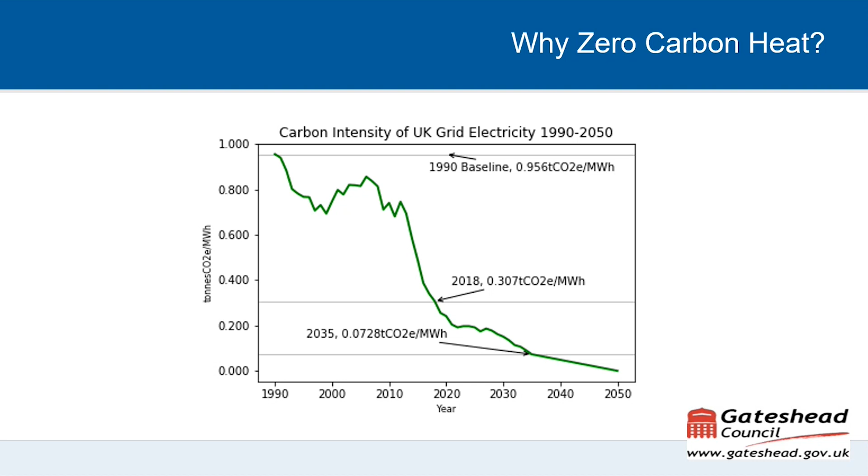It's completely opposite with gas and heat. If we did nothing, we'd be waiting until 2040 or 2050 for similar decarbonisation. And as a borough with a zero carbon target for our assets by 2030, we've shifted focus onto zero carbon heat. Next slide, please. There's many ways we can decarbonise heat.

It's also significantly the first UK trial of a public blended gas network, where 20% hydrogen has been going into 650 homes in the village of Winlaton over the last year or so. That's really helping Northern Gas Networks agree and set the new framework and regulations for the industry and the HSE to allow blended hydrogen to go into the network across the UK.

However, we accept that this really is the long game. We know there needs to be hydrogen generation infrastructure coming, and we don't expect to see massive impacts from this before 2030. So it still leaves us with a challenge between now and then.

I'm sure the audience will be very familiar with individual heat pumps, and our view at the moment is there's great application for those, particularly in new build. However, we remain concerned about their suitability in retrofit, both from a technical sense and also from a cost perspective, particularly with the current cost of living crisis and energy prices. We're loath to support anything that's going to potentially put customers' fuel bills up further than they are.

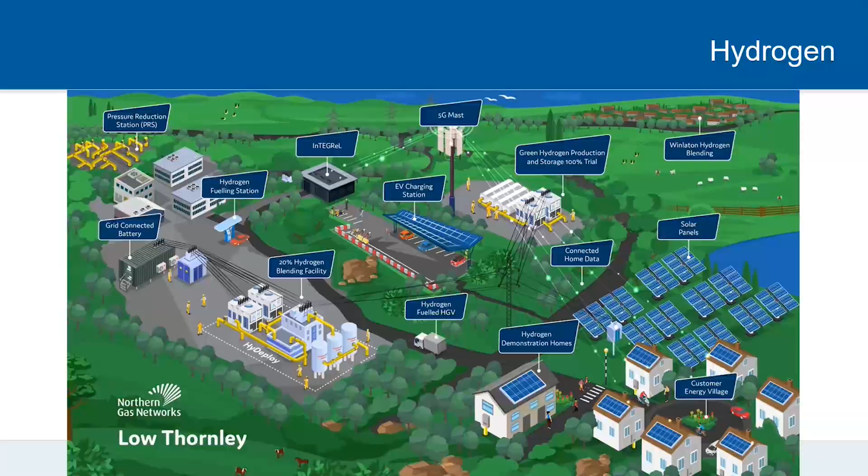So that leaves us with heat networks. In the last 5 to 10 years, we've been really exploring how we can deliver and develop heat networks to provide lower cost and lower carbon heat to customers. We're finding that these remain the most viable option for us this decade.

Yes, there's high capital costs for these, but we find there is a lot of grant support available. Importantly, these can operate on a long-term business model, using the revenues from selling that heat to recover all of those capital investments in the early years. Most importantly, we feel this can be done while keeping heat tariffs at or below the current gas market. So at the moment, we feel this is one of the only technologies to deliver that low carbon solution without putting a premium on people's heating bills.

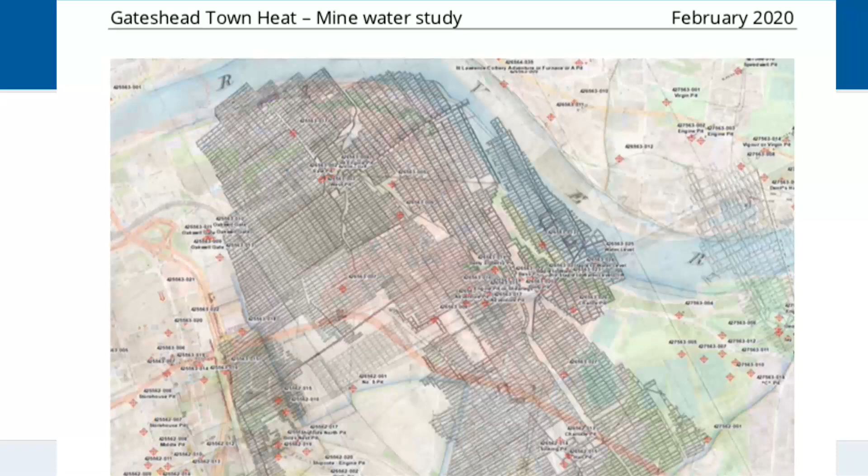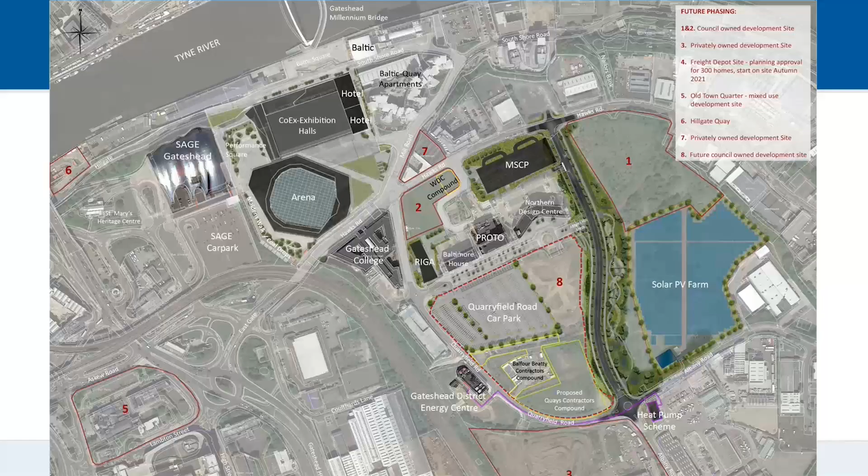Then what we do is take that mine water and put it into a heat pump building. This is probably now the UK's largest mine water heat pump system operating. We can say it's operating because we turned it on for the first time 2 weeks ago, and had our formal launch yesterday, attended by contractors and the Coal Authority. It's doing what it said - it takes that water out, chills the mine water, and heats up our water that can go into our network. This asset can now run for 20 years plus, and importantly, we think it's going to produce about 40 to 50% of the heat on our network going forward.

So what our challenge is now is that we've demonstrated the viability of heat networks in the urban core, where heat loads are dense and we have a good mix of loads. What we're trying to do now is get out to our external housing sites, both new build developments and existing ones.

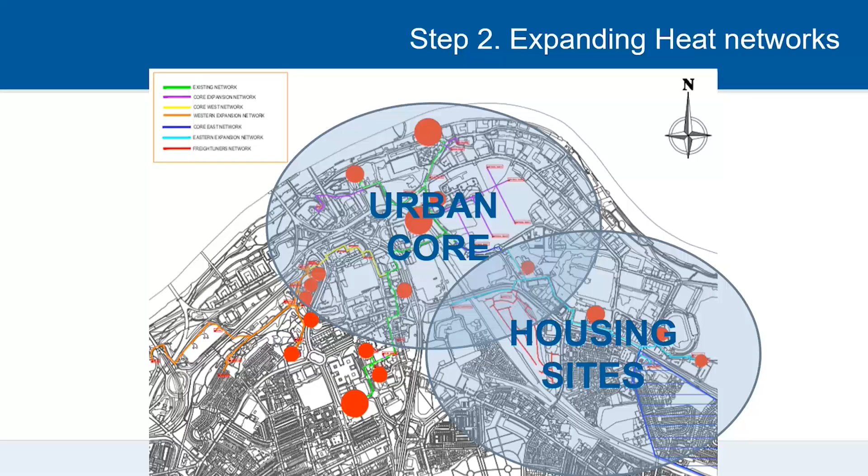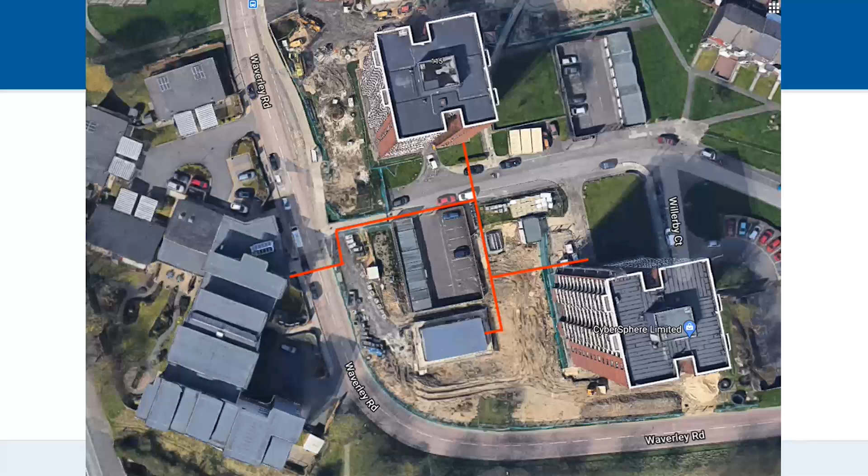As well as making the technology work in the plant room, we need to make it effective for customers. All customers receive a heat interface unit no bigger than a combi boiler, so effectively it's interaction free with the customer. They simply control the heating through a thermostat and a timer like they would a combi boiler, which makes it very easy to use.

The other thing we need to get in place is our metering and billing infrastructure. We work with third parties so that customers get a very slick, easy to use platform that allows them to do smart prepayment to settle their bills, and it also provides response and maintenance for any issues they have day to day.

With the technological learning we've had, and working on the commercial and servicing side, we're now in a position to take heat networks into new build housing developments. This site is called the Freight Depot site - 271 units, delivered in partnership by the council, Vistry, and the Gateshead Regeneration Partnership, which is taking that forward as a development. We've come alongside that and offered them a heat connection.

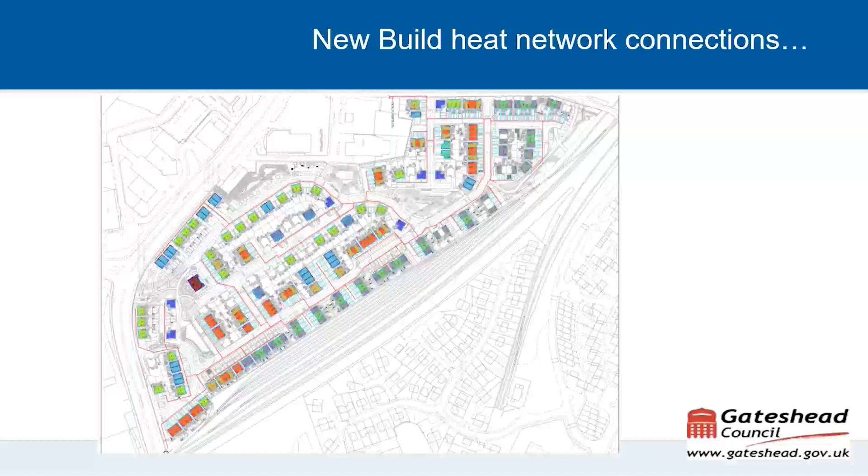Our next challenge is trying to get networks into low-rise housing estates. We've got about 10 to 15,000 homes in these kinds of estates, also co-located with schools, care homes, etc., so we can decarbonise a lot of our estate by getting heat networks into these. We have a £3 million grant to try this, hopefully within a year's time, to prove that as well.

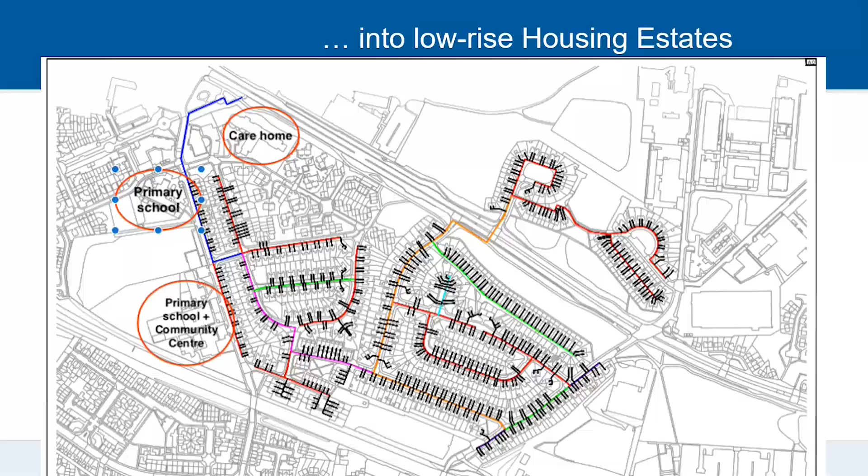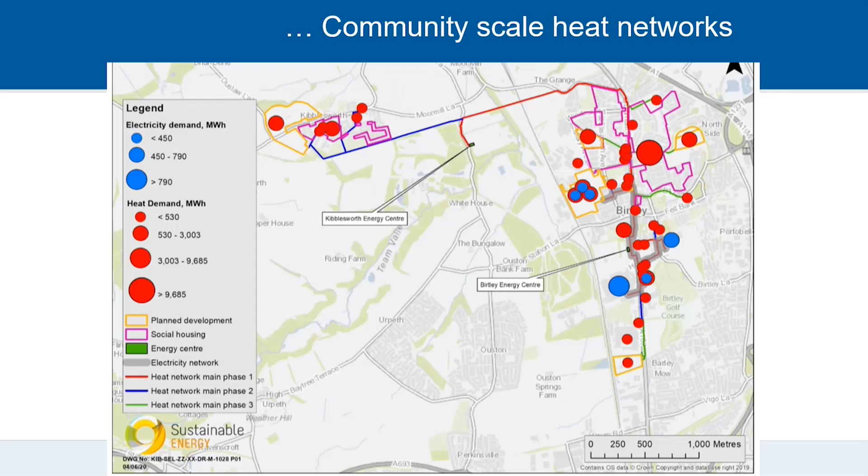We want to take it bigger, so we've started looking at feasibility at the community scale. This is an area with 3,000 homes and a lot of public buildings and commercial properties. This might come with say a £50 to £60 million price tag, but it's the kind of scheme we're looking at to really take it wider into our communities.

So our goal is we have a number of assets already in the borough. We're trying to add to that with some pilot schemes. Effectively what we're looking to do is see how we can bring this together into a portfolio of sites that we can take to the market to really deliver probably 5 heat networks in the next 5 to 10 years, with the goal of getting over 10,000 homes onto heat networks. We realise that won't deliver zero carbon to the whole of the borough, but that's where we're relying on other technologies like heat pumps in new homes, and also the evolution of hydrogen to really take the whole community on its zero carbon journey. So thank you very much.

I appreciate it's been a whistle-stop tour, and I'm happy now to hand over to Andrew Turnbull from Norwich City Council to hear more about their scheme at Goldsmith Street.

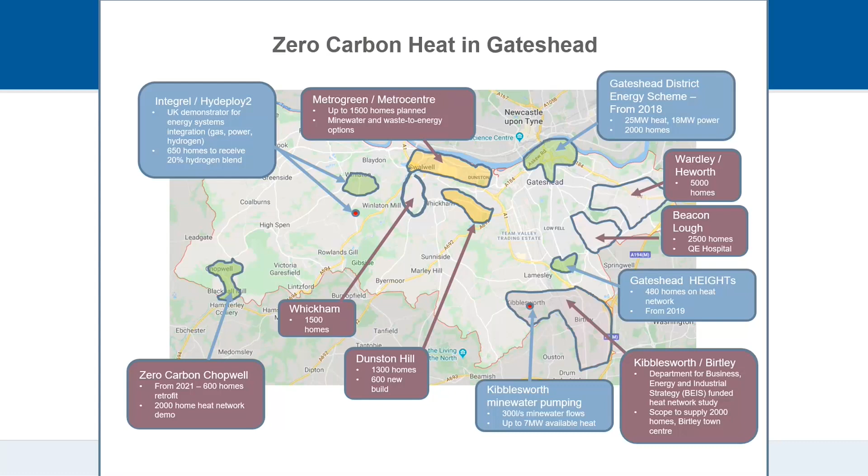So just a little bit of scene setting around Norwich City Council before going into the Goldsmith Street scheme. The Council has set us strong ambitions around meeting the housing need in the district, which is around 200 affordable homes a year. But they're also very keen that we stick to social rents and not affordable rents, so that we are addressing all aspects of poverty for our tenants.

In Norwich, we have around about 12% of residents that are currently in fuel poverty. And so they started to set us the target of looking at building standards that would help address that.

But they were also keen that it wasn't just about building homes, it was about creating communities. And so we started to think about the sustainability overall and not just about the specific properties that people live in, but the communities, the landscaping, the biodiversity, and all of those aspects around sustainability. That took real leadership and required different thinking.

We were very lucky in Norwich that we had a couple of local registered providers that had already started to go down this journey, who were really helpful with supporting us on this. I have to say a big thank you to Broadland Housing and Hastoe Housing for leading the way and sharing their learning with us.

We're also keen that we spread the message, and part of my being here today is about hopefully inspiring other local authorities to do this. It's not rocket science. If I could have the next slide, please.

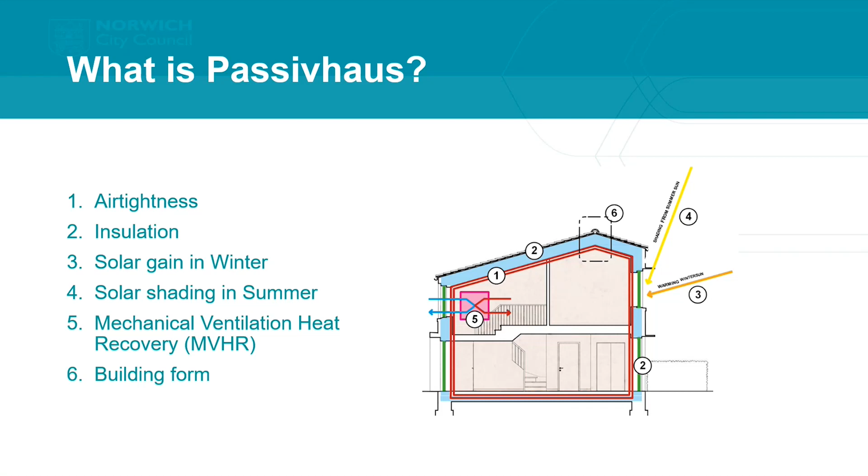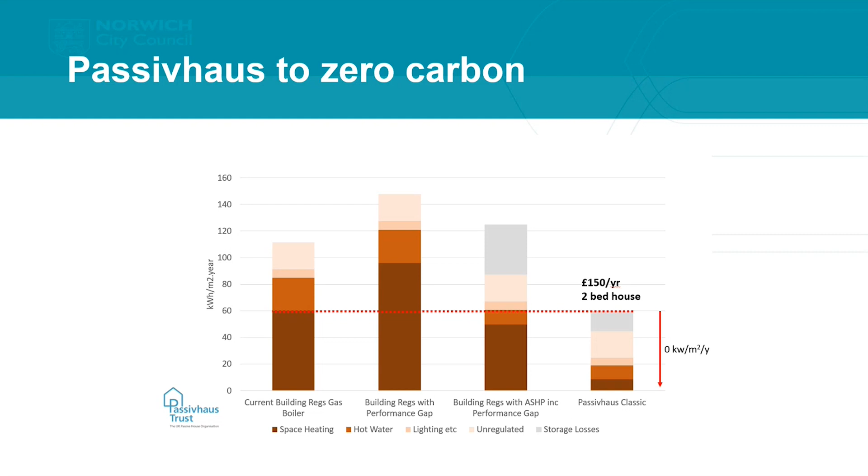So what we're looking at now is passive house principles plus renewables, to try and take our standards down to zero carbon.

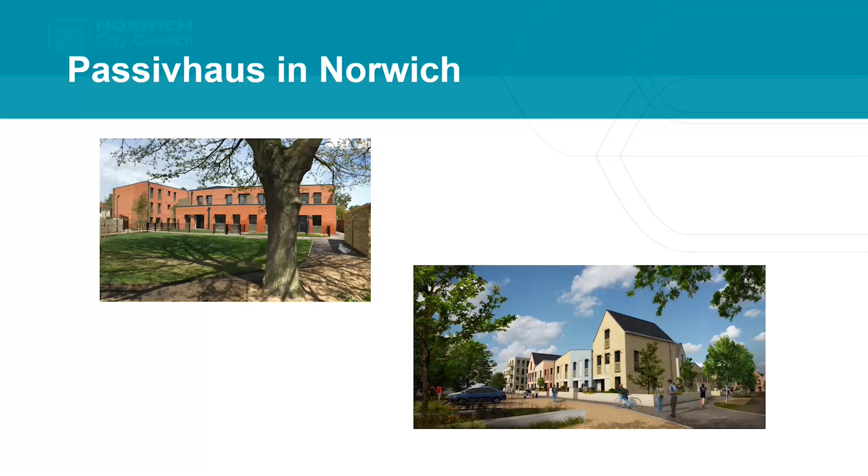Next slide please. So Goldsmith Street was delivered - originally we weren't working to deliver it ourselves, we were in partnership with 3 local registered providers. We set out that we would run an RIBA competition to select the architects, to get some different thinking into the city, to look at what was out there. We wanted this to be a really exemplar scheme - it was the largest regeneration scheme we'd done at that time.

Our design and conservation officers wrote the design brief with real ambition to triple the density, but keep a mix of houses and flats, to have reduced parking - it's only a 10-minute walk from the city centre - and to improve the transport design so we get better pedestrian and cycle links. We also decided to deliver the scheme through a JCT standard contract, which really isn't the norm these days, as design and build has become king. I think that was really key to keeping the ethos of the scheme and the high level of standards we delivered.

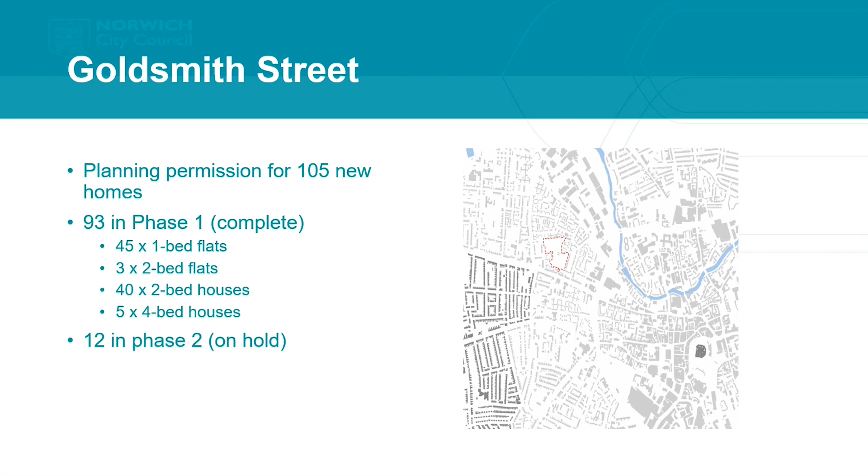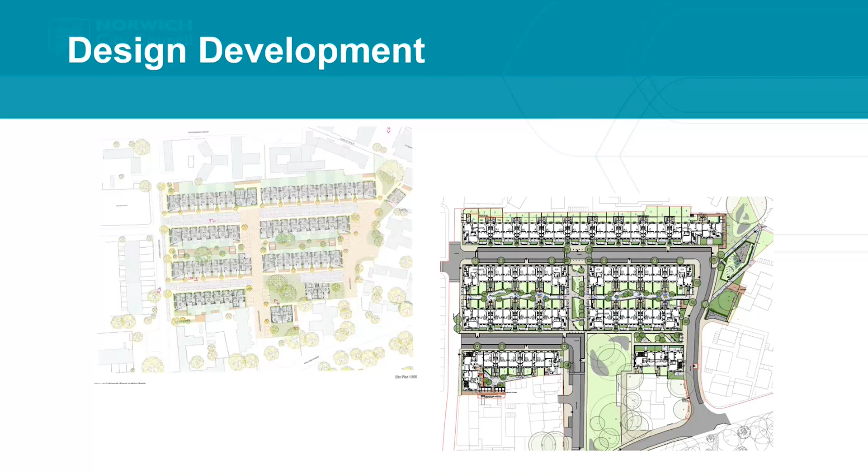If there are any planners in the room, that was a challenge for us, because we know you like to see 18 to 22 metres. But what we were able to demonstrate is that we wanted this to be a home zone to reduce traffic flow, and that really helped us with that. Planners were won over by the design team. I'm not saying that's going to be easy in every local authority, but getting planners on board early certainly helped us with this.

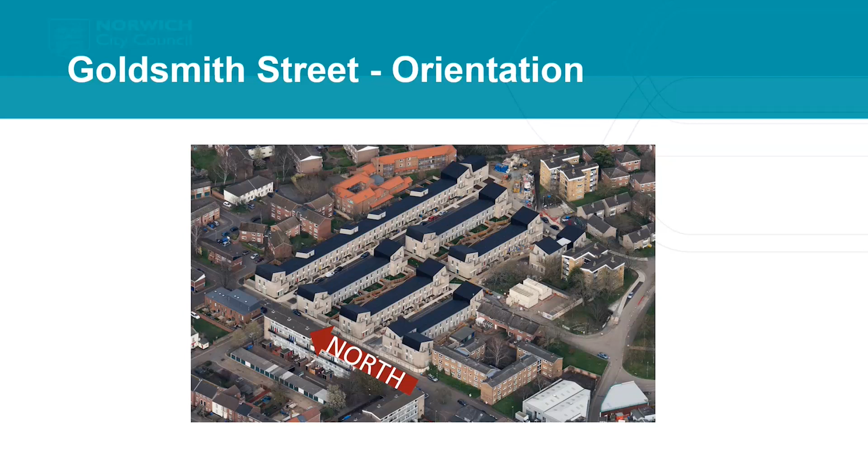So this is just the overlay to show you those terraces, showing the east-west terracing and the north-south facing terraces.

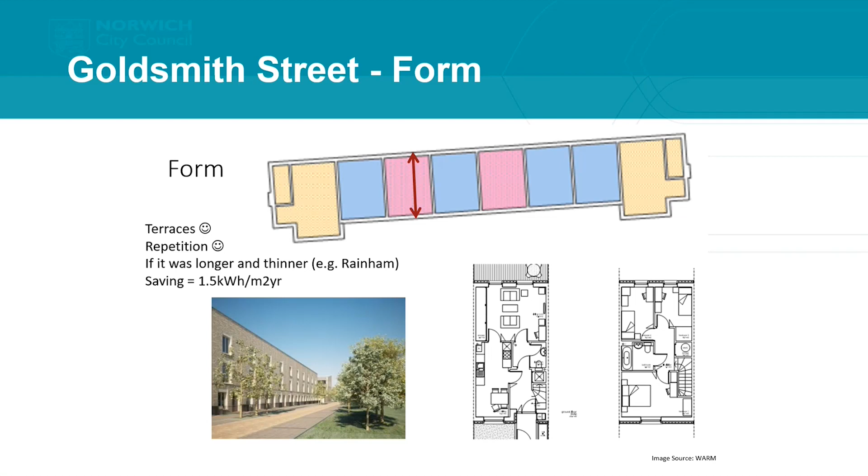The form - what we were advised is terraces are really good for Passivhaus because you've only got 2 elevations open to the elements, so you get a lot of free heat from your neighbours, which is great. We were told in a review after the fact that if we'd made them slightly longer and thinner, we could have saved even more energy and made them more efficient for our tenants. I'm keen that we learn from every project we do and take those learnings forward for future projects.

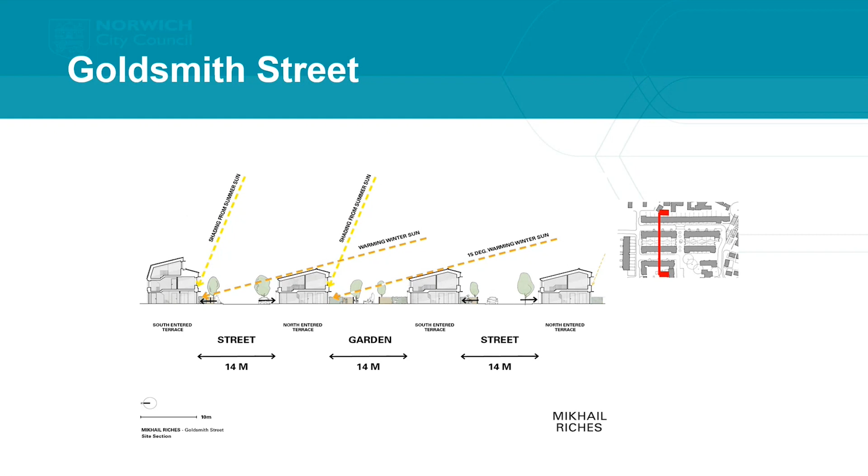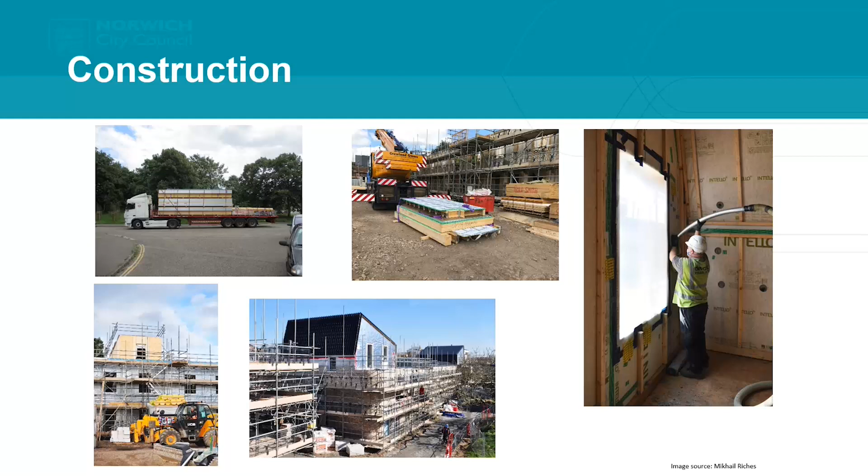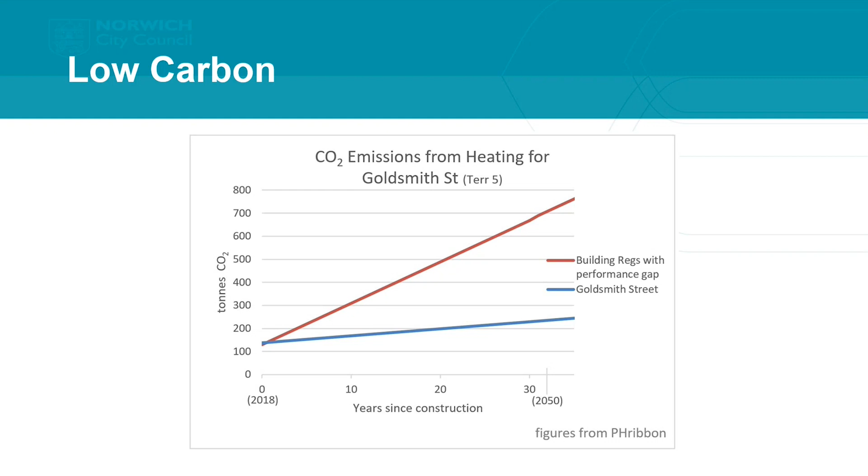It was semi-off-site, so a Signum timber frame system, slotted together on site, and then Warmcel insulation blown into the cavity. We went with Warmcel as a sustainability factor because we didn't want the plastic eco bead. So even though we weren't setting out to be zero carbon, we had those kinds of materials in mind during the design phase. What we've seen from retrospectively looking at Goldsmith Street is our CO2 emissions were actually very low compared to standard building regs. I say we didn't set out to be zero carbon, but it really showed us that the decisions we took would take us on that journey.

And we then retrospectively looked at it and compared it to the RIBA 2030 climate challenge targets, and this was key for me. So operational energy, we're already hitting that. As I said earlier, we could have even achieved better than that with a slightly narrower form. So we're well on the way with the operational energy.

The one that surprised me was embodied carbon. As I said, we didn't set out for that, but the materials we selected, with timber frame and Warmcel insulation, showed that we were already making the right decisions to get that down. And for water use, we just went for code 4 but slightly bettered it. We will be looking at that in more detail around sustainability going forward.

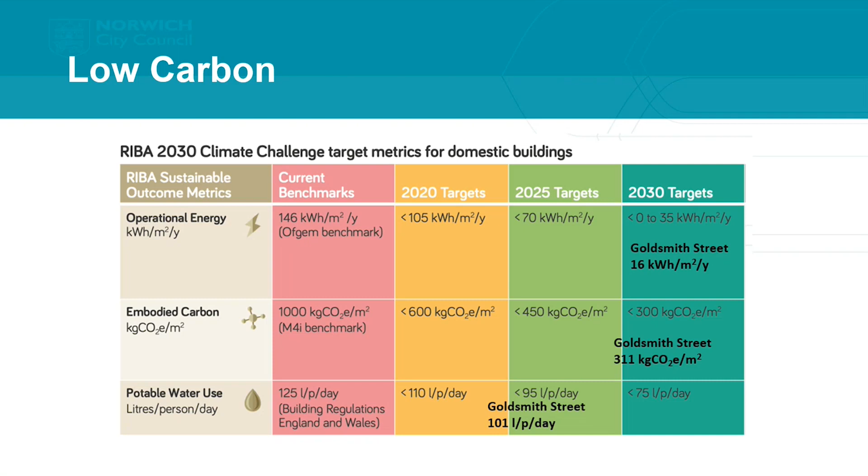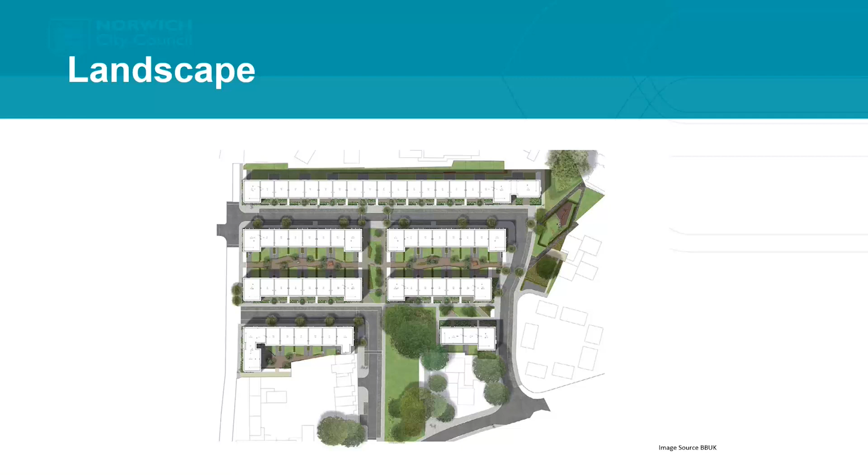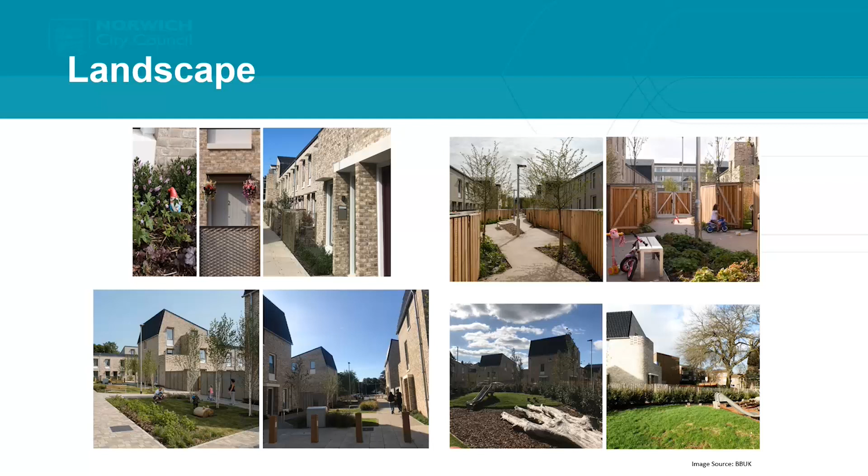So everyone is always interested in building costs. We think Passive House was typically 5 to 10% above our standard build cost at the time. These are 2016 figures, so I do need to caveat that, as we know construction has seen massive rises in inflation in costs since. We're able to fund this because we have significant housing stock we can borrow against, and we also retain our right-to-buy receipts that we were able to put into this scheme.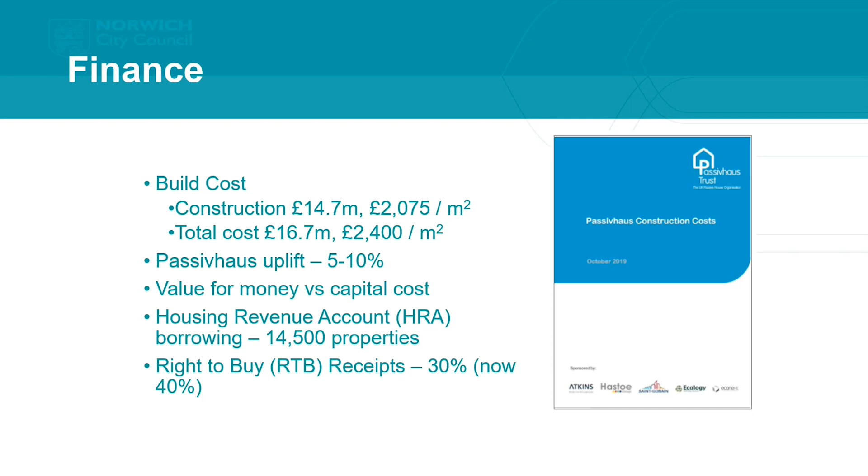So just a few lessons learned. Building form and orientation are key for me in terms of achieving Passive House at a reasonable cost, and the landscape can really help with that community building aspect, but also with biodiversity.

Collaboration is key in Passive House - having all of your contractors, subcontractors and design team collaborating together and on board was really key to achieving the standards we set. We're also lucky in Norwich, because of previous work by the housing associations, that we've got contractors who have delivered Passive House before, so the pricing in of that risk isn't as great. There's still an element of it, but perhaps not as big as it would be in other areas. Doing the standard contract, as I mentioned earlier.

The education to our tenants is key. We've learned from that initial scheme that we need to tell our tenants a bit more, but we also ran training sessions for our maintenance colleagues and contractors, run by the Green Building Store, on some of the kit we'd used, like the MVHR unit. That's key to embedding it within our maintenance programs.

On utilities, I don't want to touch that too much, but we won't be using gas going forward because of future homes standards - though gas did cause a number of issues for us on this site in terms of delays. And then post-occupancy evaluation, I'm very keen on. We weren't able to do this on Goldsmith Street, primarily because of COVID and other priorities coming in, but we are now starting that work. Last week we sent out surveys to all of our residents, and we're speaking to a university about specific post-occupancy evaluation on overheating, just to learn those lessons.

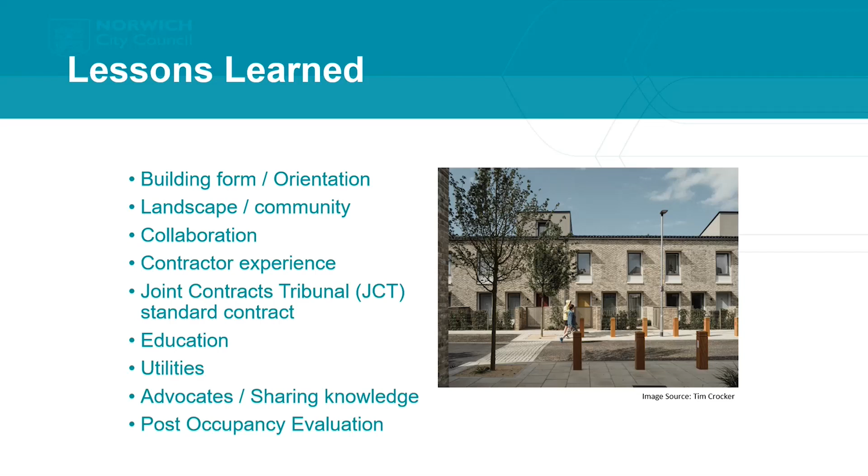Very, very quick tour of Goldsmith Street. And I'll now hand on to Amir Paul to talk to you about the Future Homes Standard.

Thank you, Andrew. So I'm Amir Paul, I work in the technical team at Homes England. We've heard two different local authority approaches there, and you can see that there are several ways to achieve the same thing when it comes to low and zero carbon. Next slide, please.

Appreciate you've endured a lot of information this morning, so I'm going to keep it fairly brief. It's a wide topic, so I'm going to talk just about the Future Home Standard and the associated regulation.

But as Ben alluded to earlier, that sits within a wider context of other policy as well, and we've heard things around biodiversity, industrial strategy, and in particular things like design codes and the planning systems. There's lots of issues around urban design too.

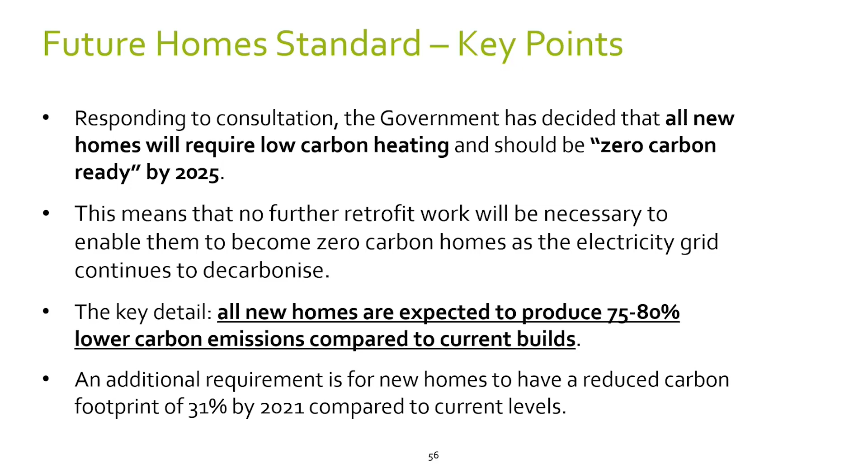So in our feedback, we think heat pumps and heat networks, which Jim's already talked about, and to a lesser extent perhaps some direct electric heating, will be the principal means of producing low carbon heat when gas boilers become obsolete.

The government does see heat networks as an important part of its low carbon heat plans, particularly in cities and high density areas. They're looking at zoning and mapping in planning terms as well, and it's one of the reasons we know Jim, because we work a lot with BEIS.

Industry is getting to grips with what that might mean, and that includes yourselves and ourselves. We're all looking at and trying to work out what this means for us.

We are looking at pilot sites, and we're looking to work in partnership with others to produce research and disseminate some market intelligence on this. A big component of that will be post-occupancy evaluation, and I know Andrew mentioned it at the end of his talk, and it's coming up in the chat too.

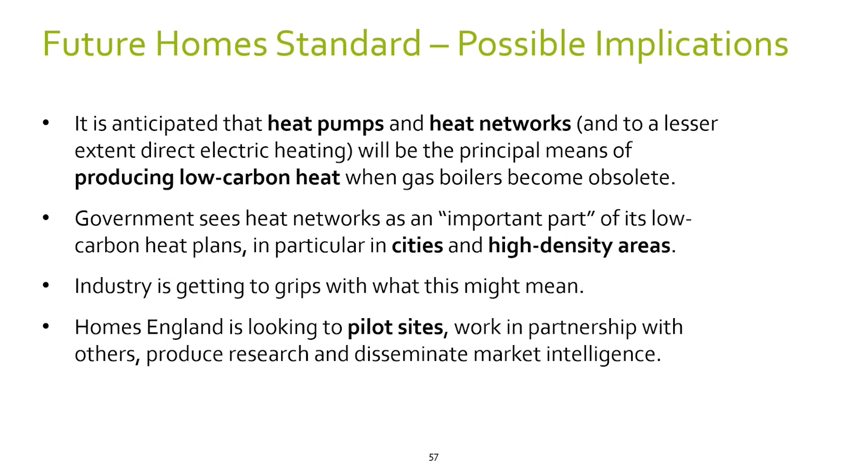So in terms of the roadmap for the building regs, the initial feedback we're getting from developer intelligence is that the initial interim arrangement doesn't pose a huge concern for developers, and these have just come into effect this summer. There are fairly well understood enhancements to fabric, and then on-plot measures such as photovoltaics, often abbreviated to PV, and heat recovery.

That's within the building, where you've got waste heat going past on a pipe, and it's recovered in that way.

Consideration of communal heat solutions using heat pumps and communal infrastructure is looking like a viable option for some developers, and there are turnkey companies emerging to provide that kind of thing, energy efficient ESCOs and so on, energy service companies.

So the transition is likely to include the fabric energy efficiency standard. That's a fabric first approach, and we've heard from Andrew, obviously passive house is one method of achieving that. Homes England is technology agnostic in its approach, so as long as you achieve the standards of the regulations and compliance, we're happy with whichever method, and we're interested in different approaches.

But the fabric efficiency can include cavity wall increases, and on some of our sites that is raising some concerns about land take. So if you've got 2,000 units on a site, and all of them are 50 millimeters wider than previous, you may lose some units as part of that, and it affects viability. So this is what we're trying to understand.

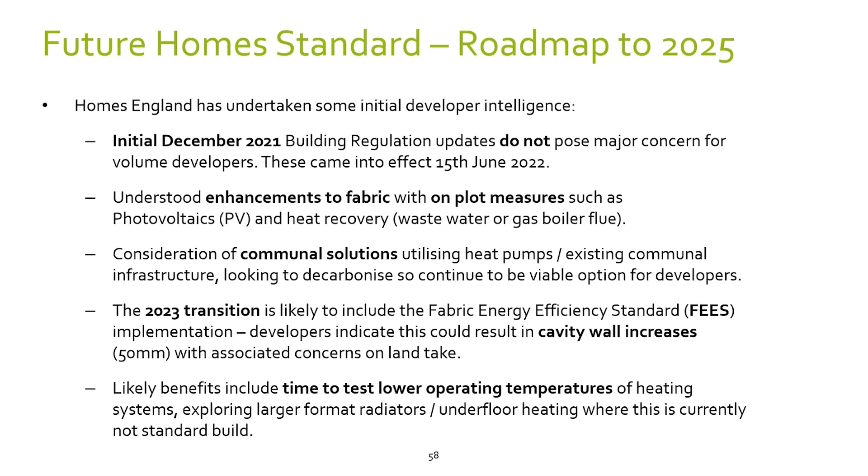So in terms of our feedback, we think initially developers are going to look at on-plot solutions, and these are likely to be individual air source heat pumps with renewables, so photovoltaic cells for instance. And there is an urban design issue about providing it at household level as well, covering individual units and machines. So it's something we're considering as part of an urban design approach.

Electricity and hydrogen boilers, as far as we're aware, are still in their infancy. It's a fairly limited market.

Major developers seem to be storing up air source heat pump supply chains, and the suppliers we're talking to are gearing up for UK production to meet the regulation. The market does need policy support though, and we work quite closely with BEIS, Department for Business, Energy and Industrial Strategy, on this whole aspect around skills and supply chain.

We were getting some current quoted costs of about £10,000 per plot uplift, with the full future homes solution next year about £15,000 to £20,000 extra per unit, and this obviously varies based on geography and approach. But these are initial figures. As with all economics, this tends to tail off quite quickly as the supply chain matures. We found that with photovoltaic cells, for example.

There's some additional considerations around the demand side for us. Obviously we put infrastructure into sites, so that might be substations and power connections, and those connection costs may be higher or larger where there's larger electrification. Developers in those cases are considering whether battery controls, smart controls and battery storage can help alleviate some of the peak loads.

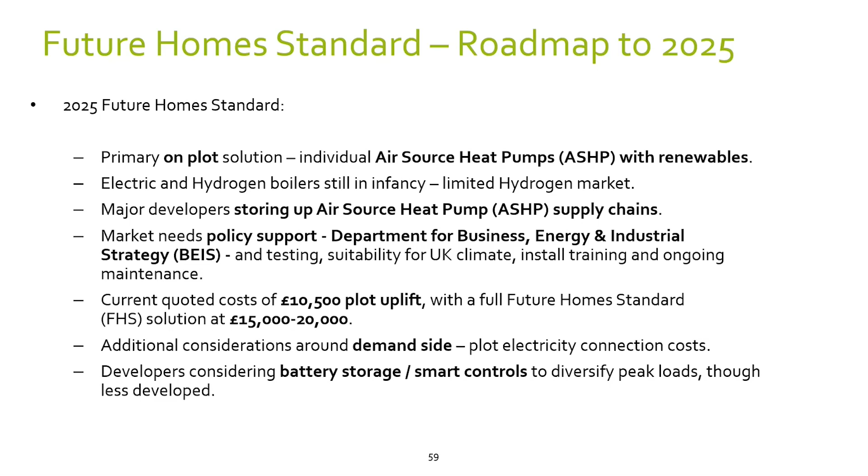So we've got here communal solutions I've talked about before, and Jim's case study really illustrates that very well. But the ones we're looking at potentially now going forward are not gas CHP, combined heat and power, but heat pumps with co-located electric boilers. Again, there's benefits there of being able to access this plant and equipment when people are at work, in a better way than if it's co-located on the individual properties.

I've talked about the ESCOs, energy service companies, offering these turnkey solutions. Developers like that, it de-risks the sites for them. There's no additional measures they need to put on the plot, it's just a fixed cost, and the ESCO takes on the ongoing management and maintenance. It can be lower in costs due to avoided costs.

So we're doing a lot of assessments at the moment on energy strategies on counterfactual - what would a gas connection or electric connection cost, and then what if you do it differently? What are the savings? Because often they're not compared side by side. I've mentioned the economies of scale, basically costs dropping as the technology changes.

We've got a lot of pipeline sites within Homes England and with local authority partners in particular, which are transition sites that ride over the kind of regulatory change, and that's a big challenge for us. Do we put gas in on phase 1, not on phase 2, phase 3, etc? And was it cheaper to do perhaps a different, electrical-only solution for the whole thing now?

That's what we're looking at as part of these pilots. Multiple phases again is causing issues and problems, and we're all working on solutions for that as quickly as we can and getting the best data we can. In terms of communal solutions, these turnkey companies are basically now offering this service, which I think is quite helpful for developers, and we may see that market maturing also.

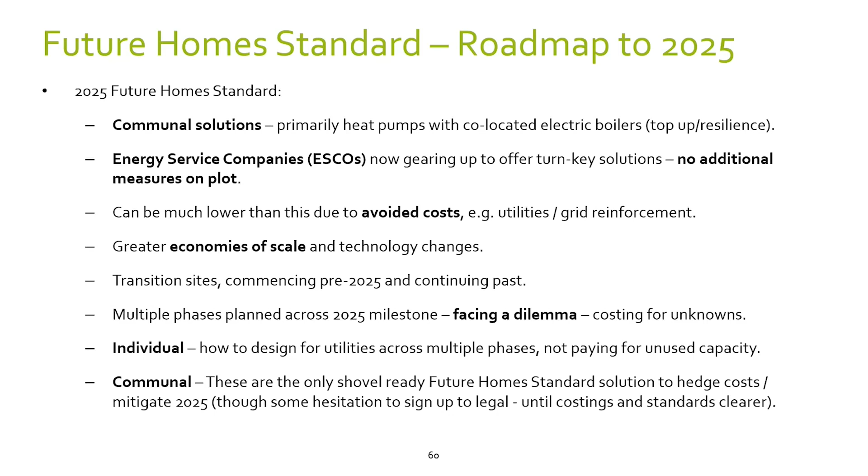So in terms of the roadmap, this is a summary really of a previous slide where we've broken down what those additional costs were, the 15 to 20 grand additional costs, and it's primarily on an individual basis the air source heat pump with FEES, which is the fabric efficiency. So you'd be looking at a technology like the one Andrew talked about, passive house, to get air tightness in there and leaking of heat sorted out.

And then there's the communal solutions, could be combined heat and power with heat network interface units, and photovoltaic cells. So there's different approaches, and these are things that need to be done. We found very much on a site-by-site basis, but we are trying to work out if there are emerging standardized solutions coming out of development.

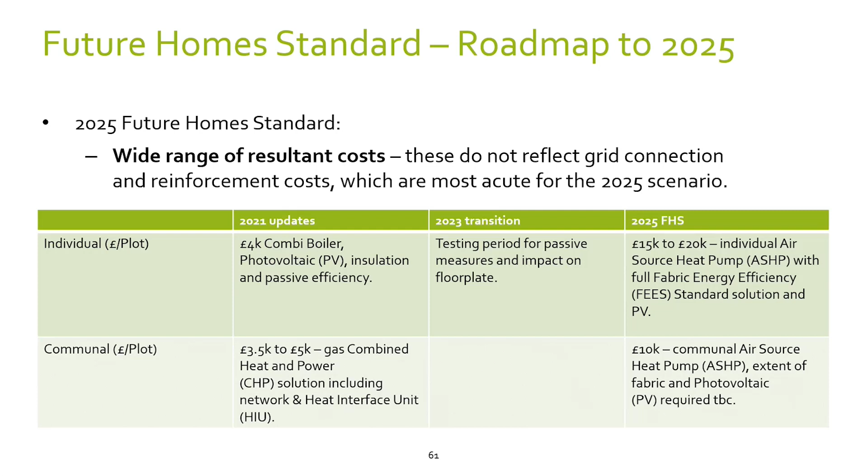In terms of some additional considerations, heat regulation - I think there's something going through Parliament at the moment around the bill related to heat regulation, the Heat Trust. They're looking to firm up a bit more consumer protections around that, and I think that's probably the right thing to do, because previously it's been unregulated, and even the industry itself is calling largely for a bit more of a regulated space, which will help handover of these type of projects to management companies and give the consumer assurances and protections.

I think there's been some mention in the chat about electrical vehicle charging. We work with the Department for Transport on some of these issues. There's additional capital costs obviously for putting in a charging point, but not only that, for us putting the infrastructure in, it does cause additional demand side loads, and that's something we have to consider in light of a wider energy strategy, not only for heating the home, but also for electrification of transport.

So there's these pilot projects that we're about to move on. I can't expand a lot on those today, because a lot of them we are just about going into contract with developers on, so they're not public information yet, as there's a lot of detail to be worked through. But the aim is to look at a series of sites and trial Future Homes Standard notional development in advance of the regulation coming in, and we'll share that with yourselves and other partners.

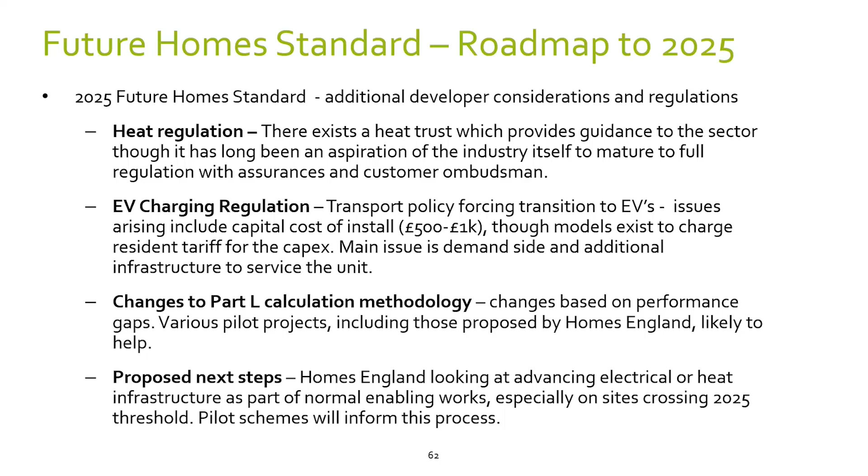The pilot schemes will inform that process. This is from the Future Homes Task Force, who we work closely with, and the Home Builders Federation, and this is just showing some of the changes needed for a typical net zero house, which is what we've talked about already, and Jim and Andrew have also expanded on some of this - fabric efficiency, low carbon heat, energy infrastructure, new technologies such as site-wide approaches, levelling of electrical demand, and renewable energy.

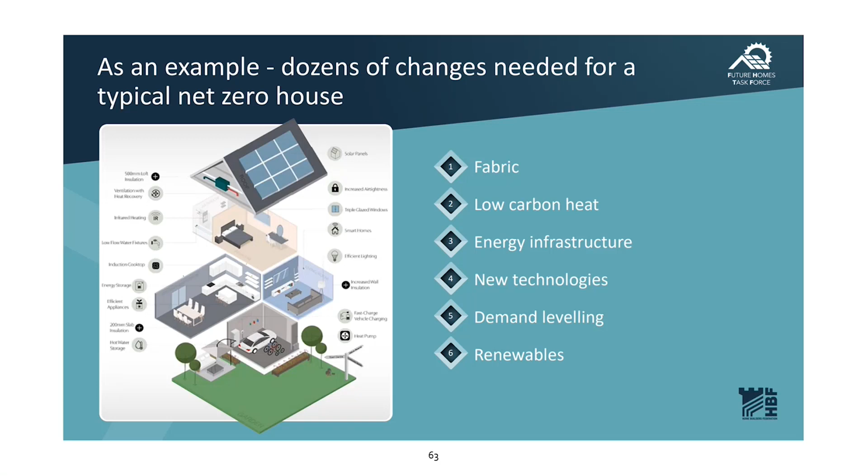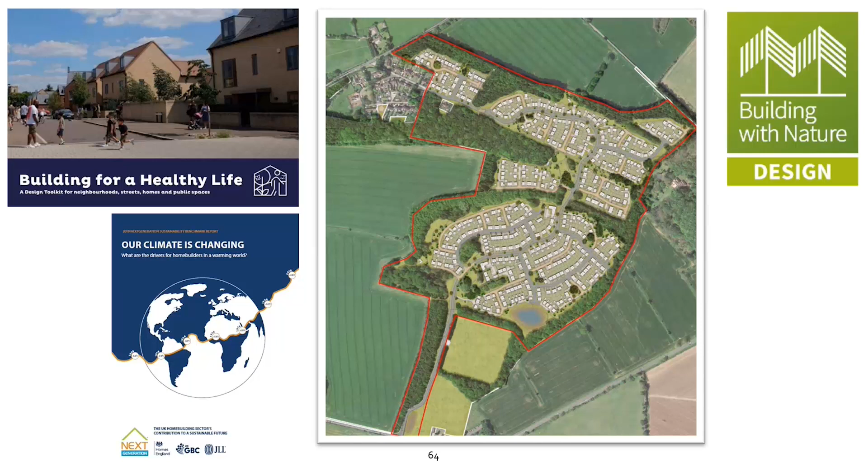So I'll close off by bringing it back to my original point, that this sits, obviously it's very technical, but it sits within a wider context of a series of other policies, like the other standards that we're pursuing. Ben has talked about those in terms of what we're looking to input into our strategic plan - things like building for a healthy life, building with nature. All these things overlap, they don't stand alone.

And in a similar way to Andrew's presentation, I think we can get lost in the technology, but in reality what we're trying to do here, and this is what we're trying to create, isn't it, collectively, all of us, is better places, sustainable places that work on a day-to-day level, as well as efficiently and in a carbon neutral way. Thank you very much. So I'm going to pass on to Sarah now, who's going to make some closing points.